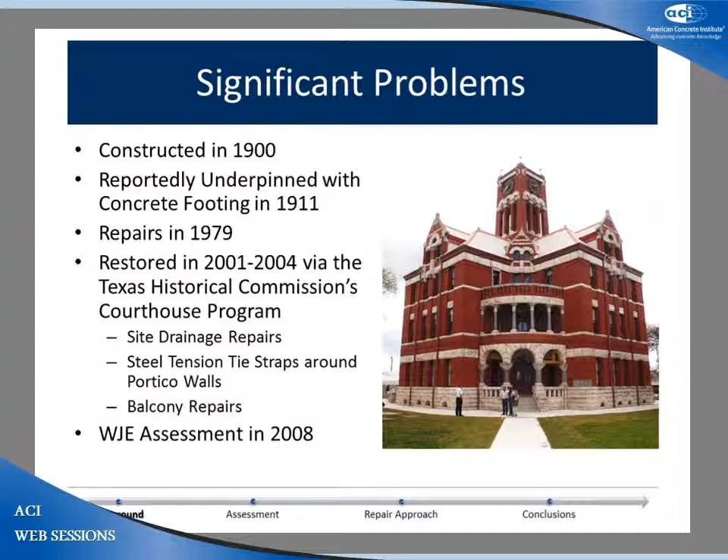In the early 2000s, then Governor George Bush created a courthouse commissioning program, which funded repairs of structures such as these. Lee County was among the first courthouses chosen for repair because of its history of distress. WJE came on site in 2008.

Just a brief overview of the structure: it's symmetrical in nature. The perimeter of the structure has a continuous masonry spread footing. The foundation wall is 6 wythe wide, and it supports approximately 40 feet of 4-wythe-wide masonry.

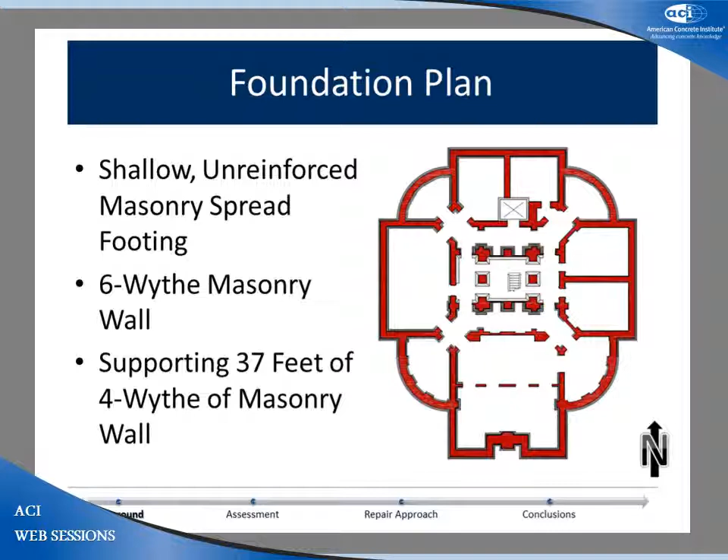This is a typical floor plan. Basically, the structure has a central core with the stairway, which has connecting arches out to the wings, and arches in between the wings, as shown there.

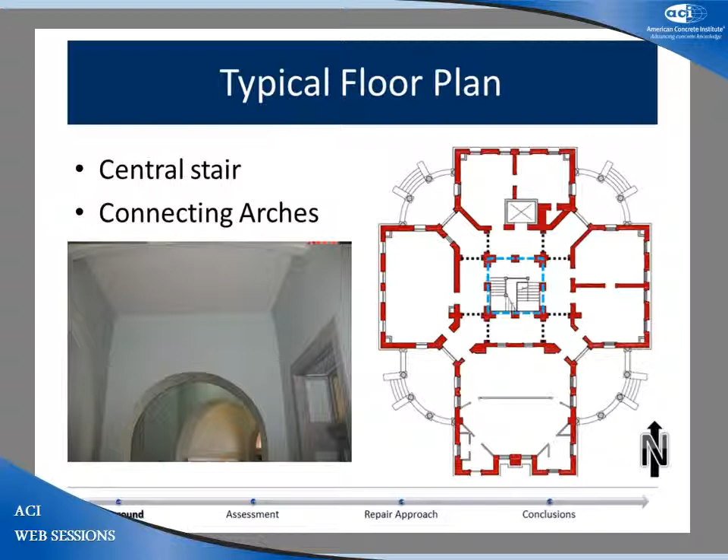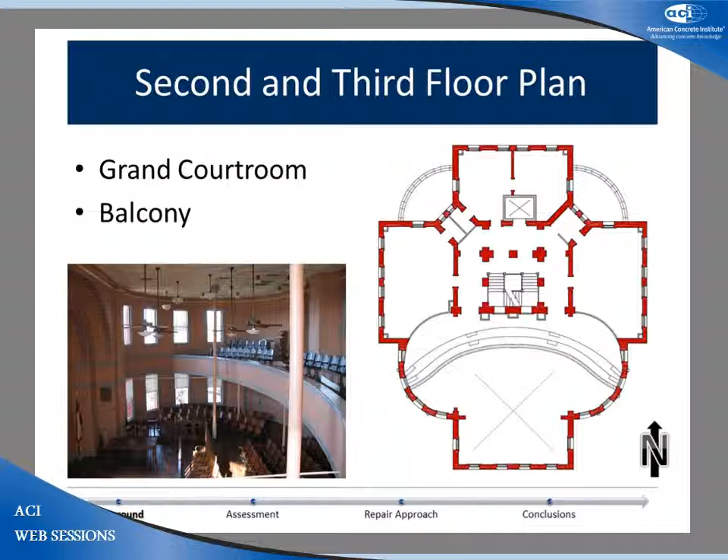The second and third floors have a similar floor plan. However, of significance is this grand courtroom and balcony area found on the south, as shown here. The significance is that the third floor diaphragm is basically missing, so there isn't as much stability, and that'll come into play later on in the presentation.

Here's a bit more information on the elevation. The south portico corresponds to the grand courtroom and balcony areas, and you can see the roof lines up with the remainder of the roof of the structure, while the northern porticos are one level below.

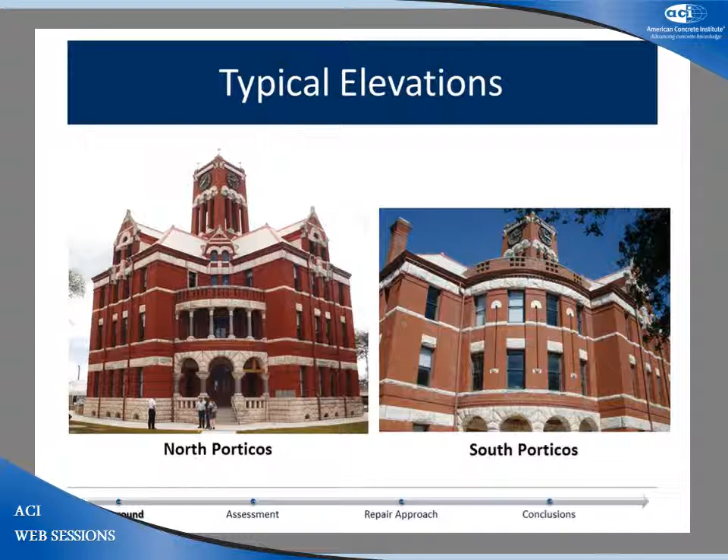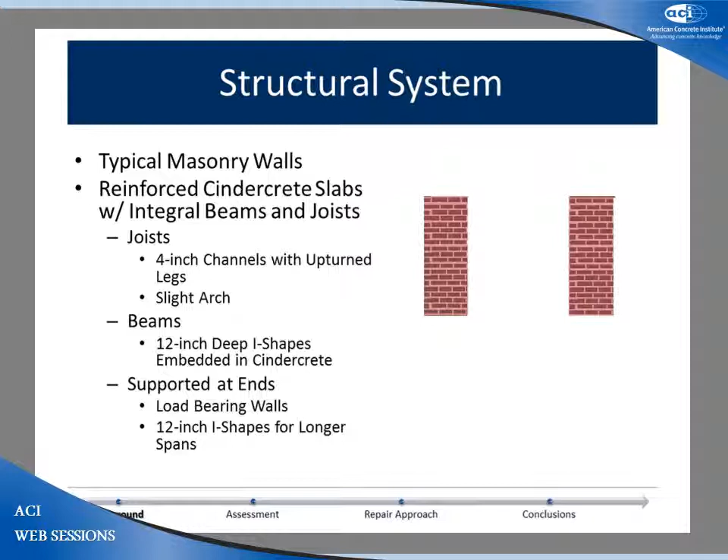The structural system, as you can see here, is load-bearing masonry walls supporting a system of I-shapes and upturned channels and a slight arch, a cindercrete slab that's reinforced with heavy wire gauge mesh.

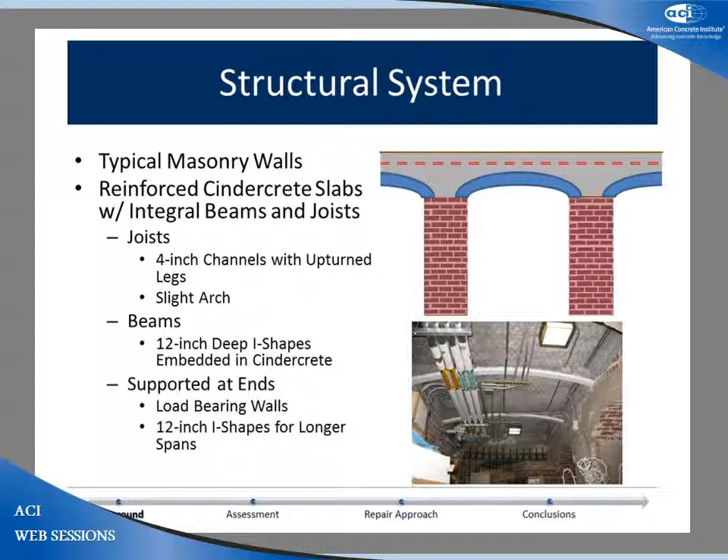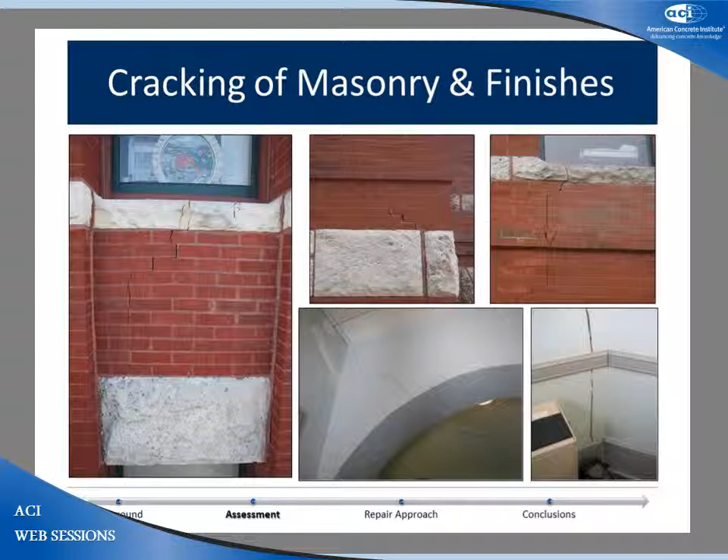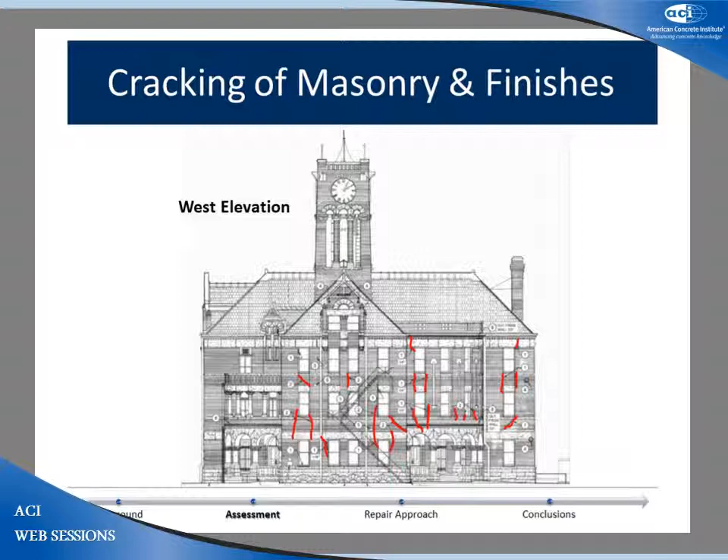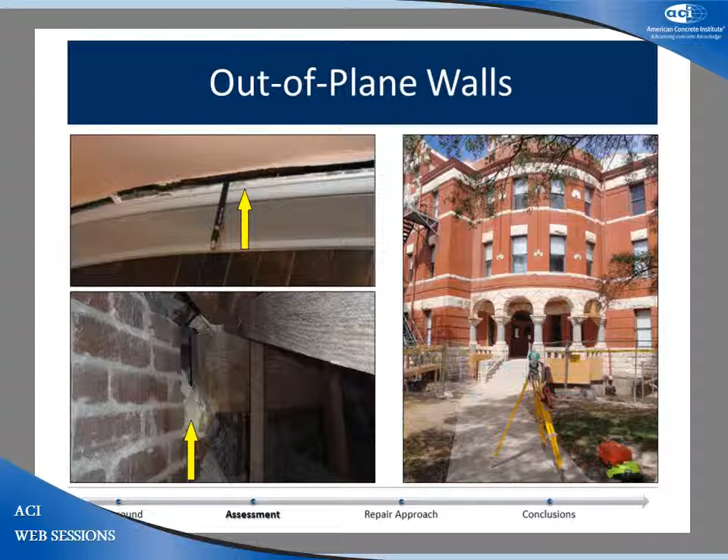An area we noticed was the balcony location. We saw that the baseboard had separated from the exterior balcony wall, or the exterior wall at the portico. Some of the wood frame members had withdrawn from the exterior wall, so we performed a total station survey, and found that the out-of-plane deflection at the roof level was up to 1.6 inches, lessening as it went down to the base.

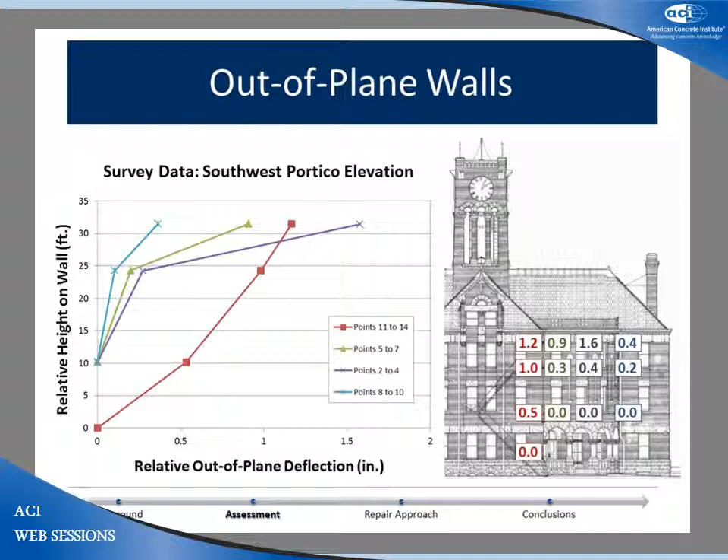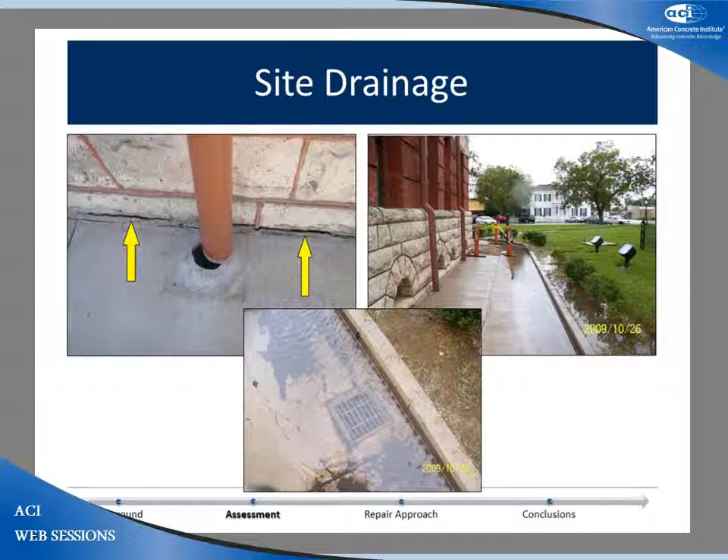Other issues included deteriorated joint sealants at the perimeter, ponding water, and clogged area drains. And now Stephen will continue with the presentation.

As we continued our assessment, one main task we wanted to perform was a geotechnical investigation. We found natural fat clays on site, which are common to Central Texas. We performed 7 different boring locations, one from the interior core of the building and the rest around the perimeter, either interior or exterior. Our geotechnical engineer told us we had a medium to very high shrinkage and swelling potential with various levels of moisture fluctuation.

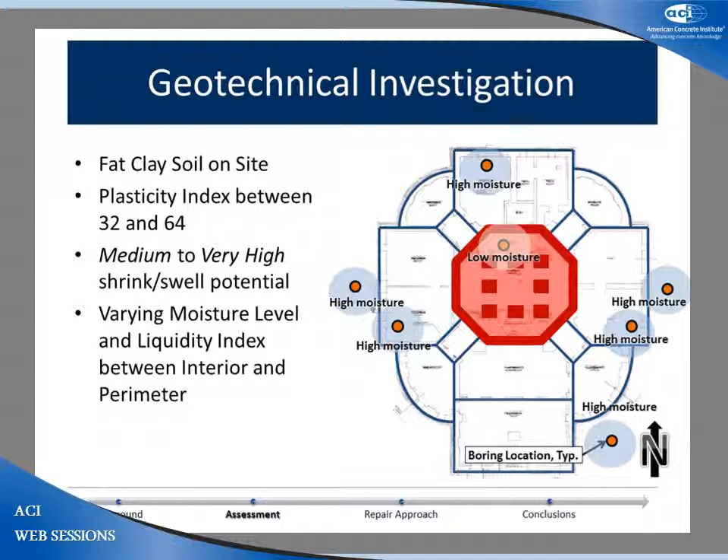What we found was our interior boring showed low moisture content compared to our exterior borings, which showed higher moisture content. We also had a different liquidity index of the soil, so we had different soil conditions between the inside and outside of the building.

So the question was, what's going on? Obviously we've got all sorts of distress. What we determined was we had this relatively stable central core, both from the inherent construction with that central stairwell and also stable soil compared to our perimeter.

With our arches almost acting as hinge points to our structure, when that natural fat clay would expand and contract due to moisture, we got differential movement of the foundation, which resulted in cracking of the walls, a result of our unreinforced masonry footing being unable to distribute those differential movements between the soils.

And the out-of-plane wall movement that Gabe referenced on the portico wall was also a result of that shrinkage and swelling of the soil and localized movement of the footing.

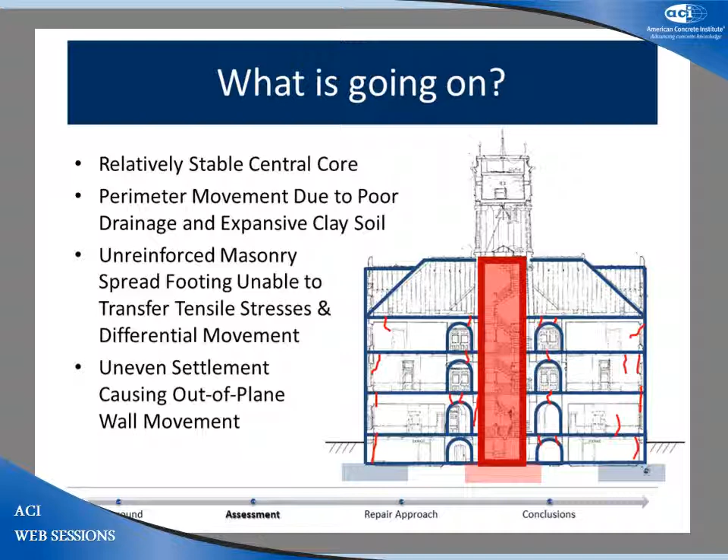So how to fix it? Our approach had to account for these various challenges. As Gabe mentioned, it was a registered historical landmark, which meant our repairs had to be consistent with the Secretary of the Interior standards. The courthouse was going to remain open throughout the process, so we had to take into account all the various considerations.

The employees were constantly indicating movement. It got to the point where we felt like they were saying the sky was falling every other day, and it got to be the boy crying wolf to some extent. But obviously there was movement going on, so we had to accommodate all those various activities and several unforeseen conditions, as we'll get into.

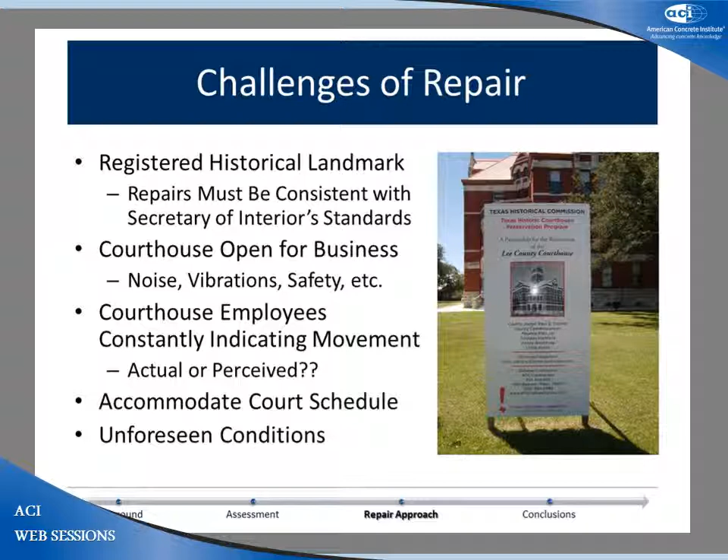Partly because of the employees, but also for our own security and comfort, we installed a couple of different monitoring systems. First, we used simple crack gauges at locations based on the tenant's indications of where continued movement was occurring, but also in areas specific to the structural consideration.

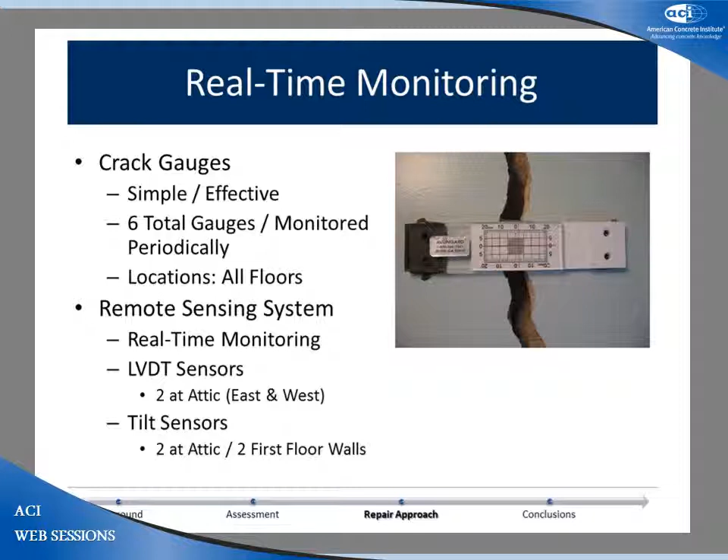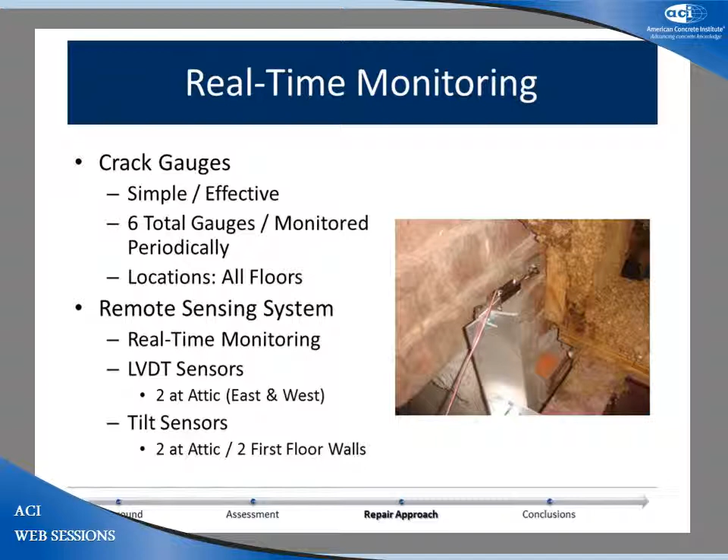We would monitor those during our site visits throughout the course of construction. We also used a real-time monitoring system during the repairs, as you'll see when we get into how we excavated underneath the building, to monitor should anything get beyond preset limits. We used LVDT sensors to monitor deflection and tilt sensors to monitor rotation of the walls.

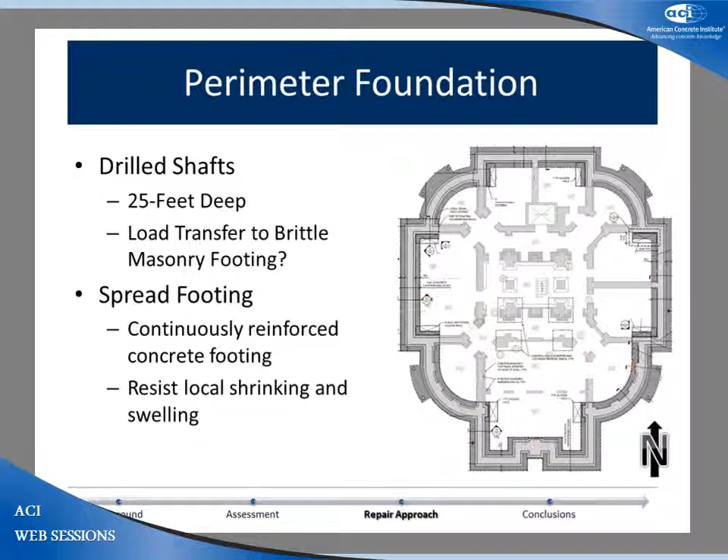So the question was, what do we want to do with the perimeter footing? We considered drilled shafts. Our geotechnical engineer recommended 25 foot deep, but that was tossed out the window for the same reasons - we wouldn't be able to transfer the load across that brittle masonry footing.

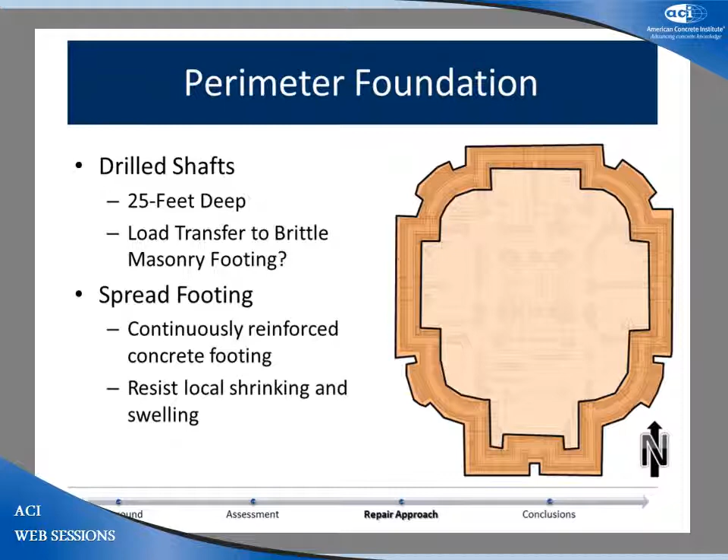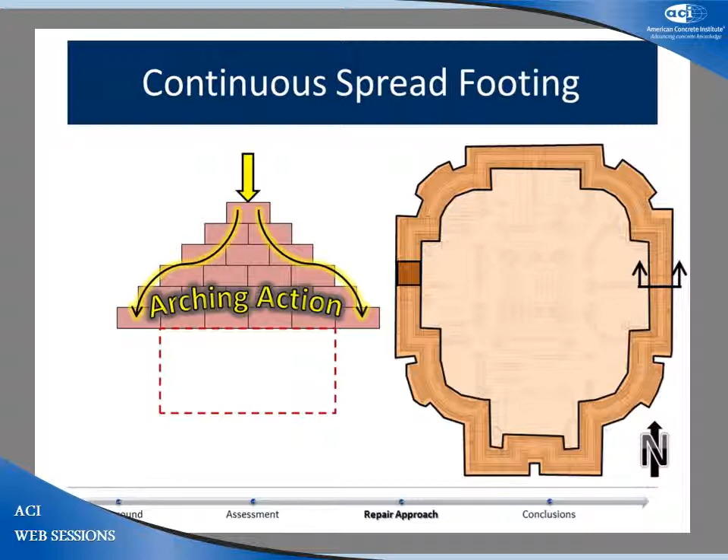So we quickly went into designing a continuously reinforced concrete footing, which allowed us to take into account the benefits of the arching action of the masonry. When we excavate a particular section to put our new underpinning in, that load will be distributed due to the running bond of the masonry, and then we could move around in a hopscotch-like pattern to put in our underpinning segment.

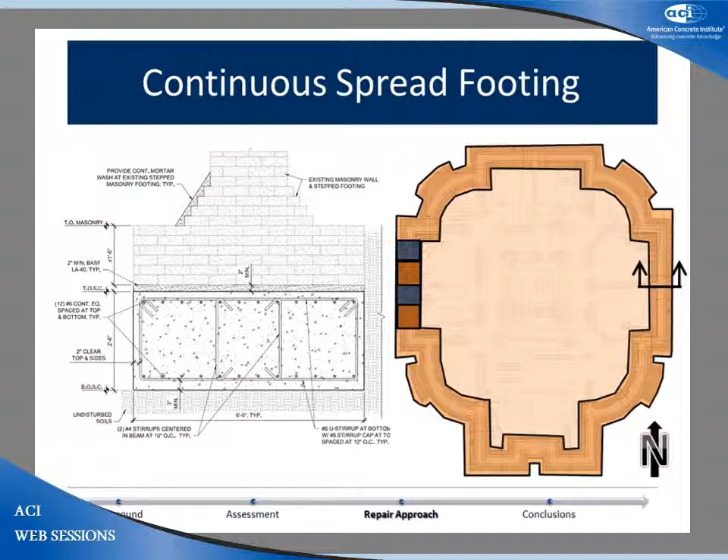Our design was 2.5 feet deep with 6 feet wide. We had 12 number 6 bars, longitudinal reinforcement, top and bottom, and quadruple leg stirrups, number 5s at 10 inches on center.

As I alluded to, we followed a leg and leg approach, which meant we would excavate a segment. Our segments were 6 foot, which was determined by the arching action of the masonry, but also by the lap lengths - it's a combination of the two to determine what size bars you have. We'll determine what lap length you need, working that with how much the masonry can span.

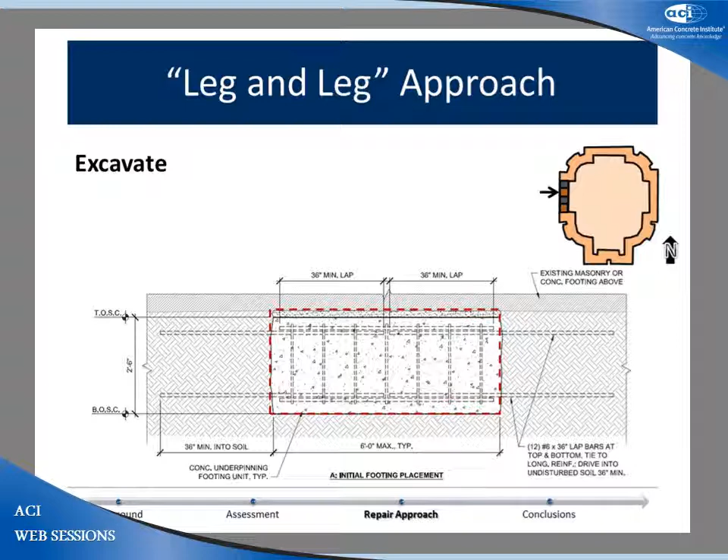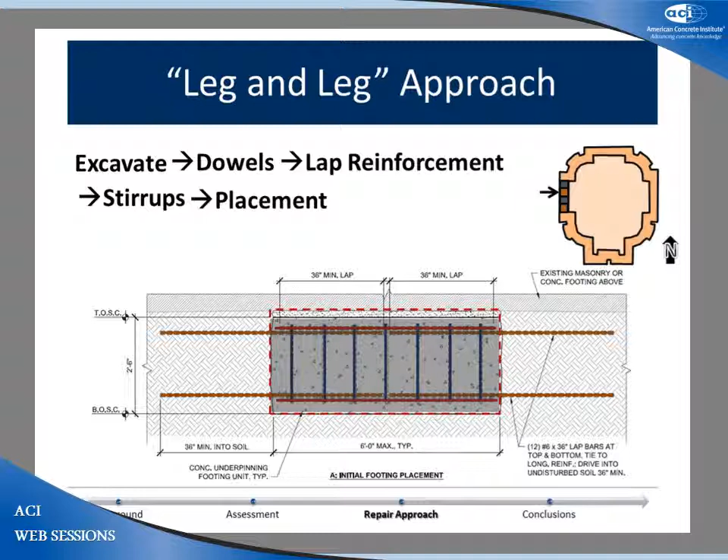So we would dowel in our adjacent reinforcement for the next segments. We tie in our lap reinforcement to the longitudinals, then put in our stirrup cage and cast our segment. We also did a grout strip detail at the top, which we'll talk about in a minute - that was to promote bond between the masonry footing and our underpinning.

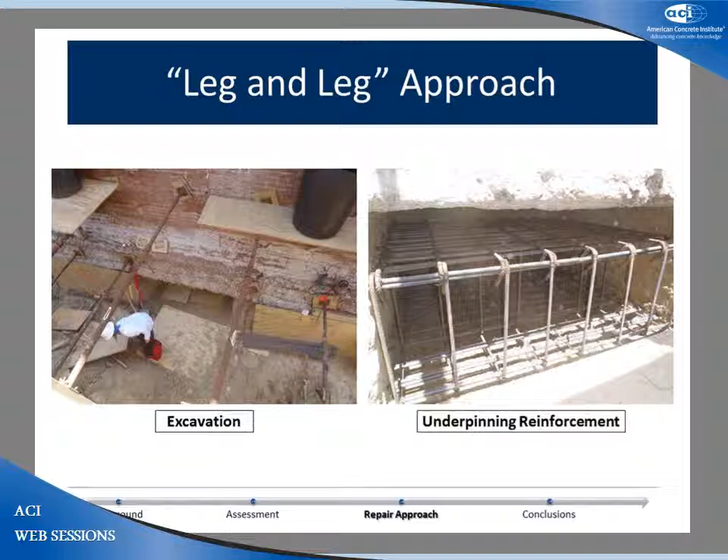So you see here the typical excavation. The reinforcement cage is in place. We've cast the segment, excavation has started, and then this is your dowel reinforcement when the excavation is complete.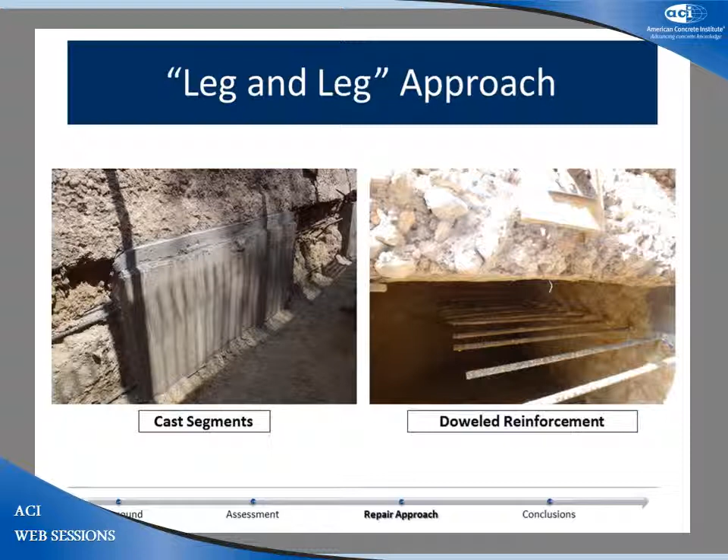Our grout strip detail was 2 to 4 inches in the field typically. We pumped that with a non-shrink grout material to promote a good bond line. Our typical mix, we were concerned that we may get too much shrinkage and separation at that bond line. Here you can see when we excavate the next segment, it was cast tight to the masonry footing.

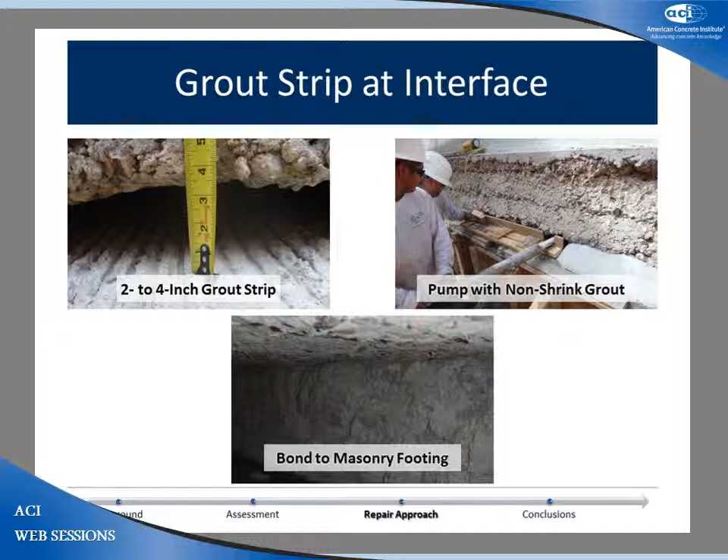Another detail to consider was at the corners. We couldn't capitalize on the benefit of the arching action at the exterior wall. So our approach was to essentially cut the corner in half, excavate half at a time, dowel the same type of reinforcement. What the contractor elected to do was shore half with a series of needle beams you can see here. So you'd excavate, shore, excavate the other half, put in the whole segment, and cast it.

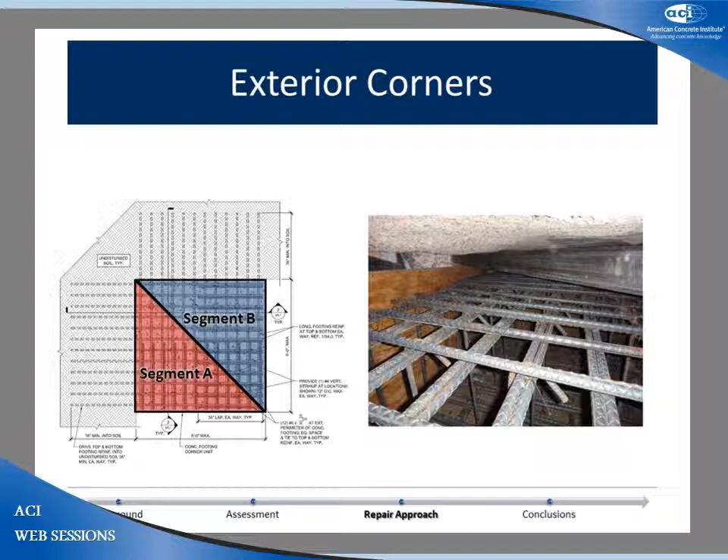This was another way our grout strip was able to be a benefit to us. We could cast the whole segment and then split our grout strip placement into half. Once the first grout strip met our strength, then the contractor could remove the needle beams and cast the next segment.

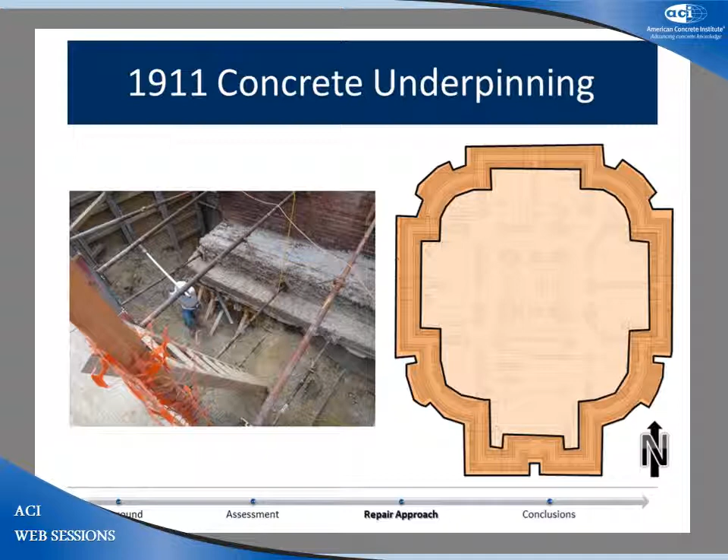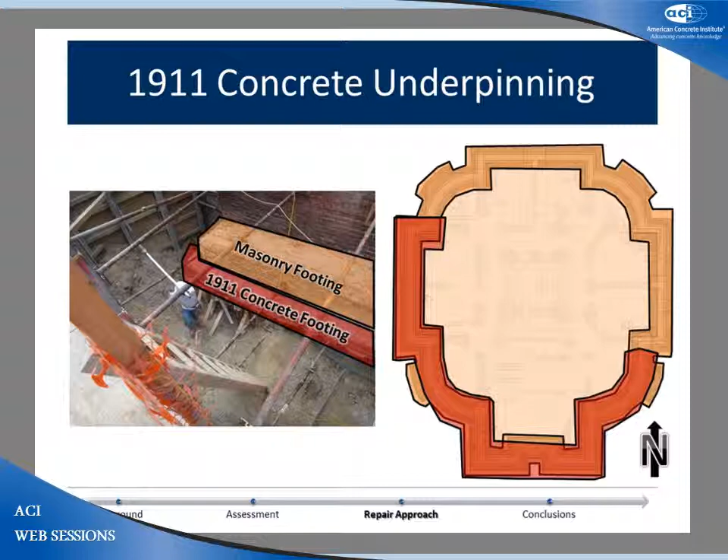As Gabe alluded to early on, there was an underpinning performed in 1911. You can see here the original masonry footing, and then a concrete footing that was installed in 1911. We understood it to be at the southwest half of the building, as indicated here. So in our design, we knew we had to account for stepping underneath that 1911 footing. You can see here we really have two corners, an interior corner, an exterior corner, and a step. We've got our lap lengths to get our continuous reinforcement top and bottom, our hairpins to close the corners, some of the detailing involved in our original design.

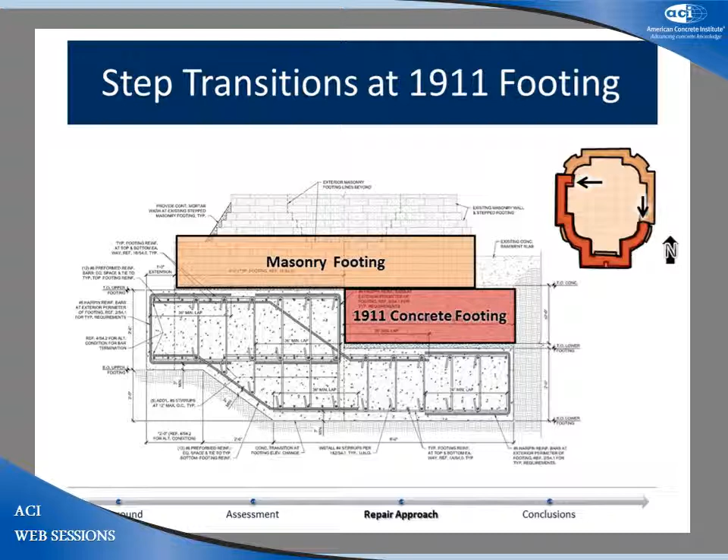When we got out on site, however, the entire span of that 1911 footing was completely voided out. It appeared that the contractor had excavated from the interior, excavated from the exterior, poured concrete from either side, and it never consolidated to the middle. I didn't bring a better photo, but you can see here some of the square Ransome bars that the previous presenter talked about. There was some reinforcement in there as well.

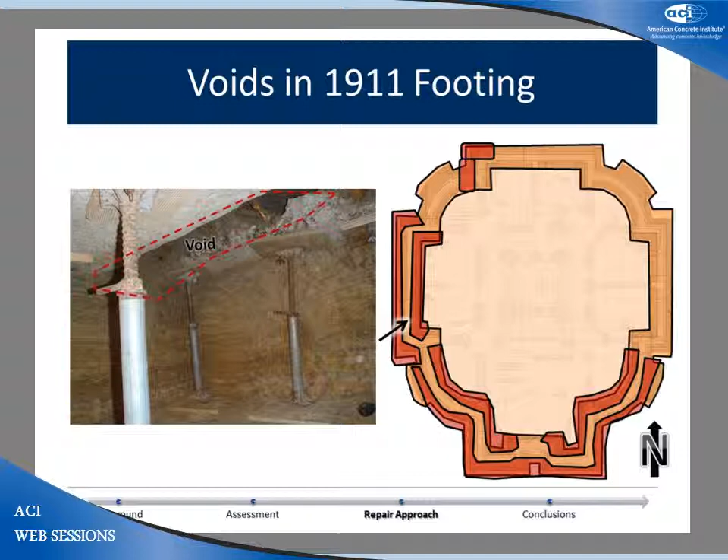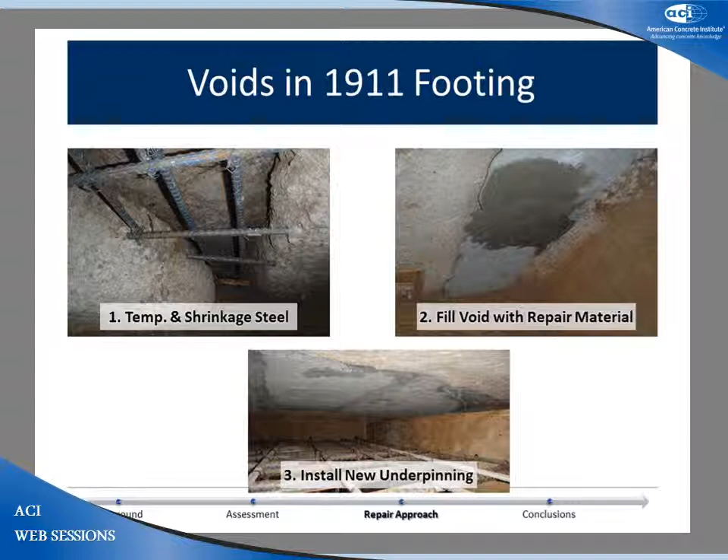So our approach then changed. Rather than our original leg and leg approach, the first step was to repair those voids. What we did was just treat that as a compression element to continue to get the load down to our new footing. We put some temperature and shrinkage steel into our opening, tied that to the existing square bar, if you could see one here. There was some areas that had more than others. We placed it again with a non-shrink repair material, and then continued with our new underpinning, which created a lot of detailing and field conditions and changes.

It was a complex process for the contractor and for us in the field. We had areas where we had steps, as I alluded to in our original design, but there were also additional steps due to the presence of the footing in places we weren't expecting. We had areas where we had a step and a void. We had areas where we needed to demo out the 1911 footing to accommodate certain things. The curved portico walls that you saw earlier, our underpinning had to follow that as well.

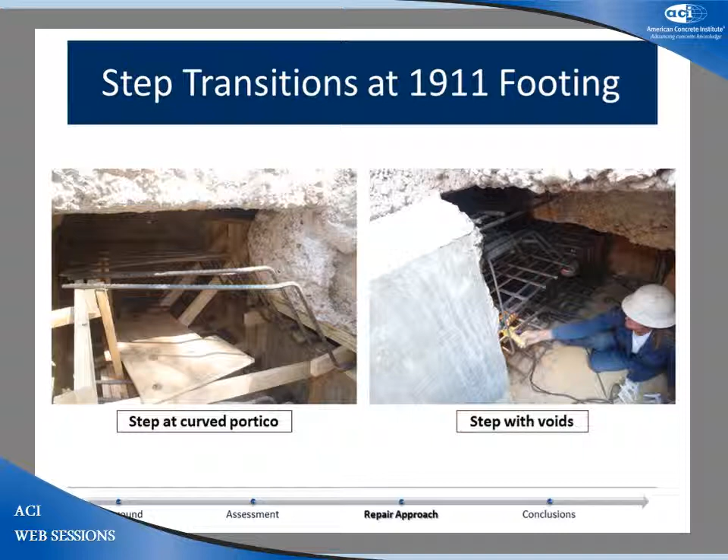So a lot of challenges, but ultimately, as we talked about earlier, the changes between the historic concrete and what we're able to do today with modern construction practices, we were able to provide a uniform, stiff perimeter reinforced concrete footing. We also took into account the wall stabilization for that south portico wall, and Gabe's going to talk more about that. All right, thanks, Stephen.

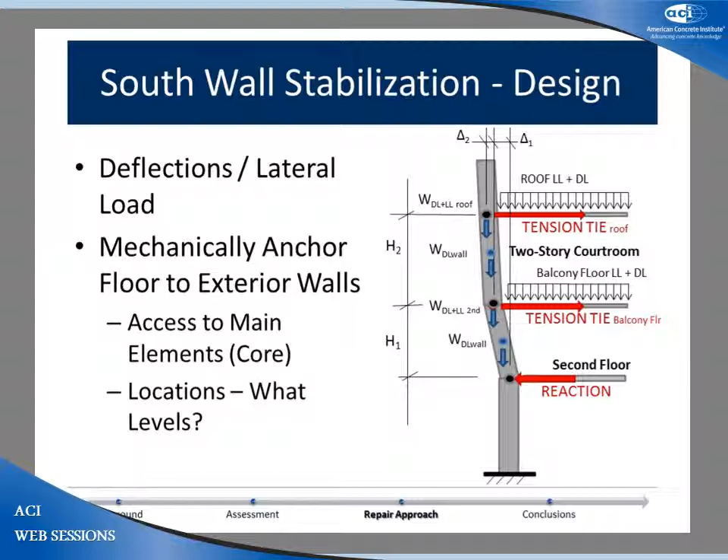Upon completion of the foundation stabilization project, we focused our attention onto the walls that we had noticed had out-of-plane deflection. We knew we had to stabilize the walls back to the central core because that was the most stable portion of the building. At the roof and at the balcony level, we were able to use tension rods to transfer that load or at least maintain it in place. However, on the second floor, because of historic finishes and such, we decided to use a different approach. The approach that we used was to use the existing structure.

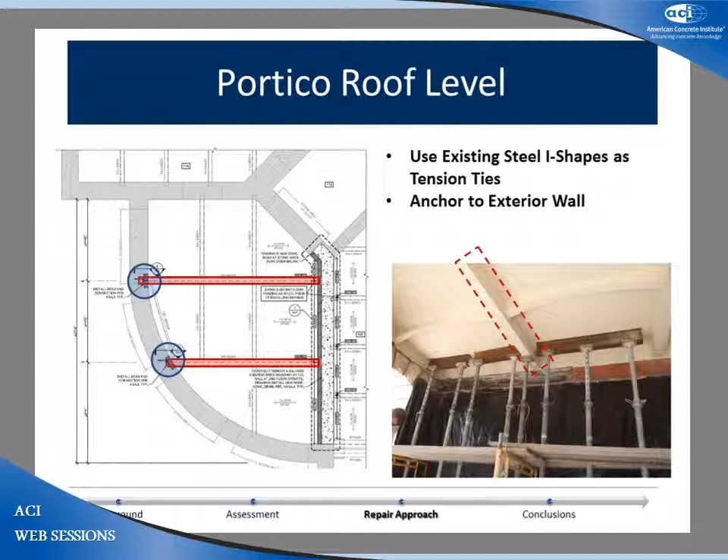So as you can see here, there was an existing I-shaped beam that we decided to turn into a tension tie member. What we did was attach it to the exterior wall using clip angles and post-install anchors. We welded to the I-shape there, and then installed a concrete beam. The concrete beam extends from this area here to the exterior wall. We doweled the northern area here back to the wall on the interior of the courthouse, and doweled here at the exterior.

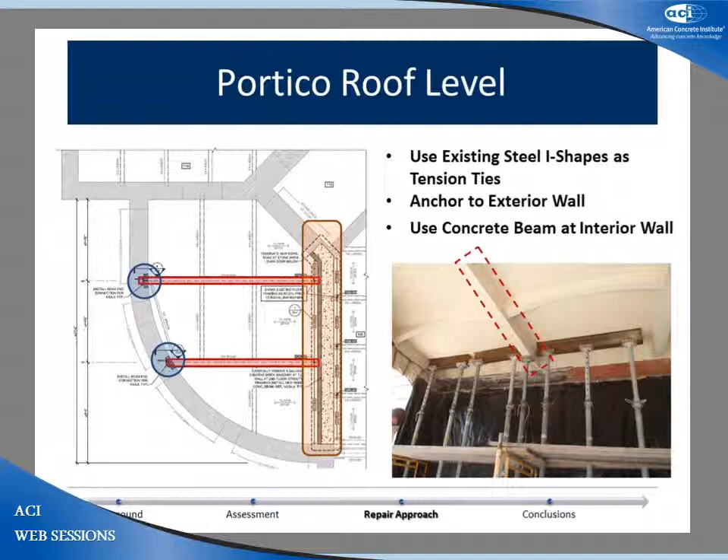This cross section here shows what we had to do to get into that area to pour that concrete beam. We shored the second floor that has the courtroom above, demoed about 3 or 4 wythes of masonry wall, and then placed that concrete, as you can see there.

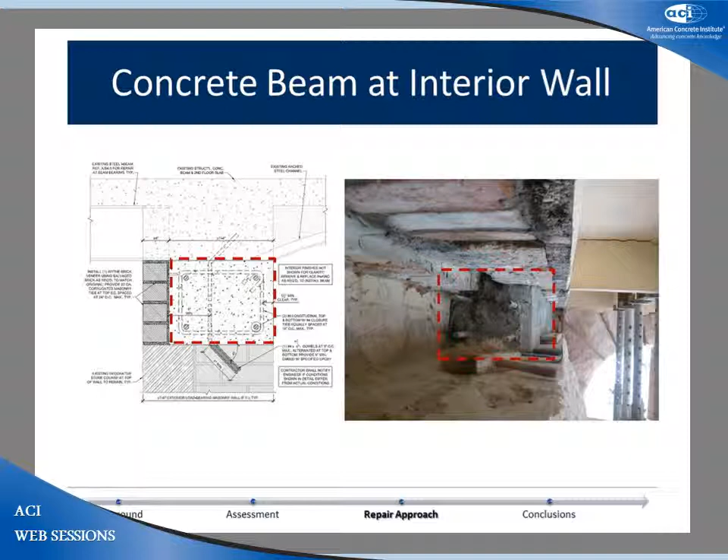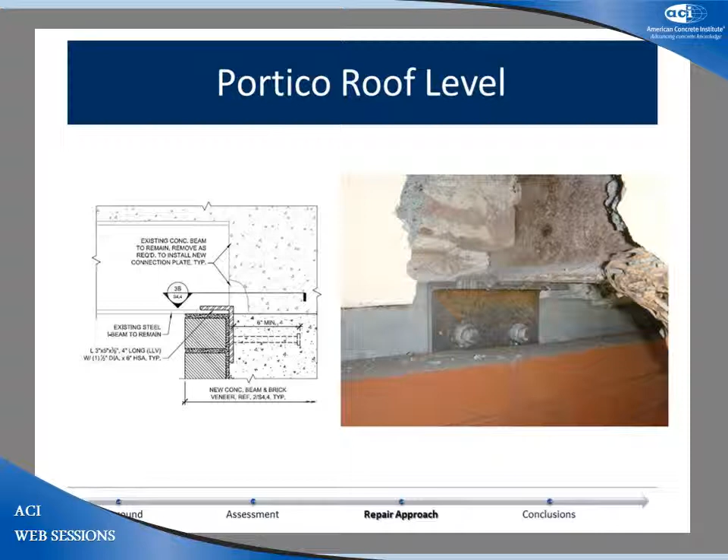This is the finished product. That concrete beam spans as shown previously, and this angle here basically completes the connection for the tension tie from the exterior wall to the concrete flexural beam. All we did was weld a clip angle and post install into the concrete beam. That's basically the finished product.

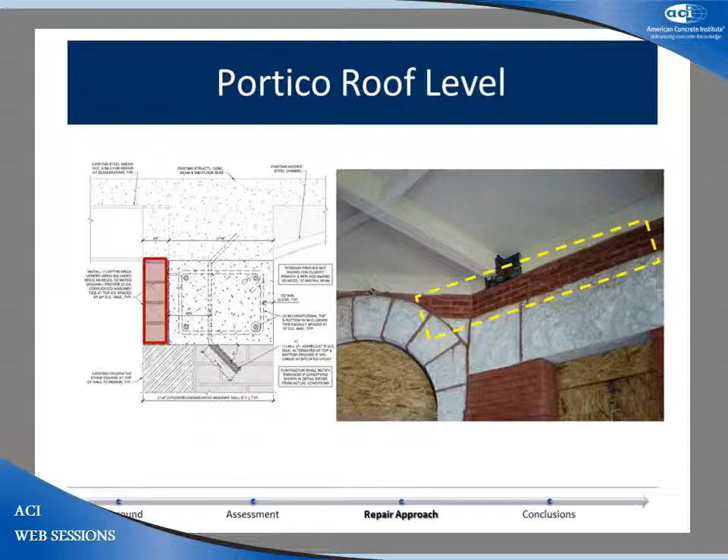As you can see, we used concrete to provide a flexural stabilizing member, and we were able to conceal it. Now, in summary, we've used different concrete elements to strengthen and stabilize the courthouse.